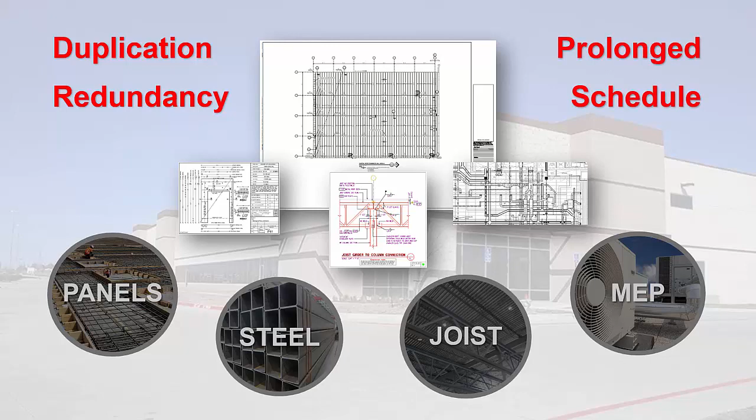Upfront detailing across the trades can take 8 weeks or more on projects. What if we could eliminate duplication and redundant coordination and reduce that to 2 weeks?

Introducing Power Panel from CMK BIM Consulting.

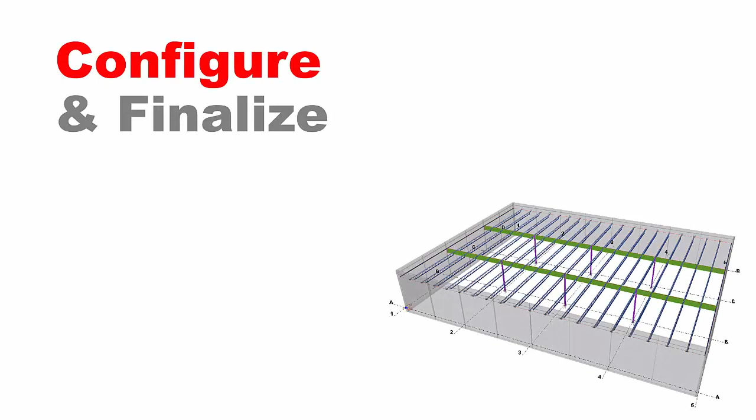TiltUp can be easily configured and then finalized. The main layout and each key element of the building can be configured in minutes. The panels and connections can then be refined in further detail. Steel and concrete drawings are extracted from the same coordinated 3D model, preventing duplication and extra coordination time.

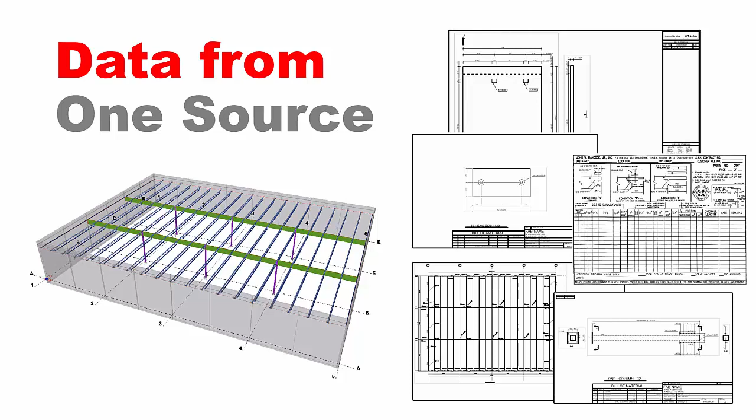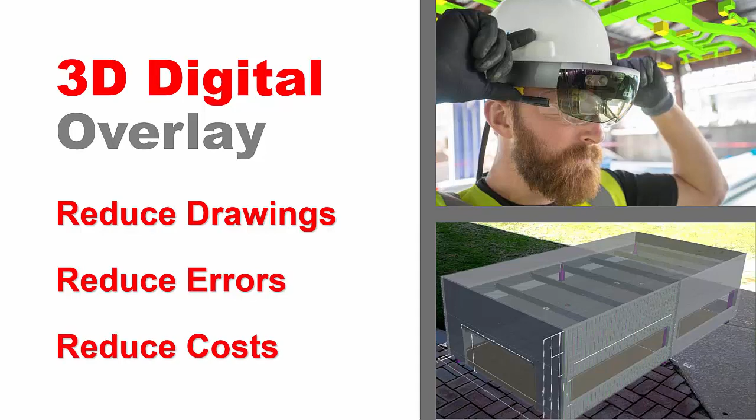The model can be easily published to the owner or other project stakeholders. And using Microsoft HoloLens or mobile devices, you can overlay the digital model in the real world. This reduces the need for drawings and allows the customers and contractor to see exactly what they're building.

To get started, let's first highlight the Power Panel plugin or configurator. We'll go ahead and open up the properties here, and you can see that I can enter in the typical building geometry that I'm going to use for a TiltUp project. I can enter in specific bay spacings, and it doesn't have to be equal. So I could do 3 spaces at 30, then I could do a 40-foot bay, or I can do any other odd bay size that I need here as a distance list.

I can do the same thing on the tilt panel spacing along the length or the width of the building, as well as do a maximum joist spacing or enter in specific spaces and distances that'll work with the grid system. Once you've entered in all of this information and in the most common joist, girder, or supporting beam, as well as tilt panel and column information, you can then easily configure and create the base foundation of all the elements of your TiltUp project.

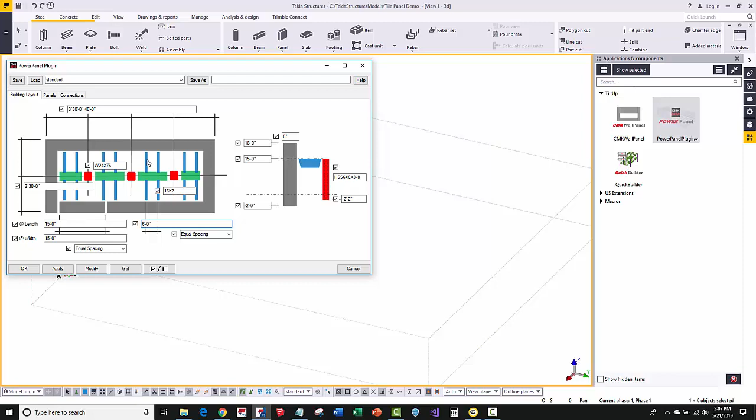So I'm just going to go ahead and say apply on these settings, and then I'm just going to basically activate the component. I will then pick an origin point or location and a second point to orientate this, and this is especially helpful if you have like an L-shaped TiltUp project or if you have multiple buildings that are working on the same overall project.

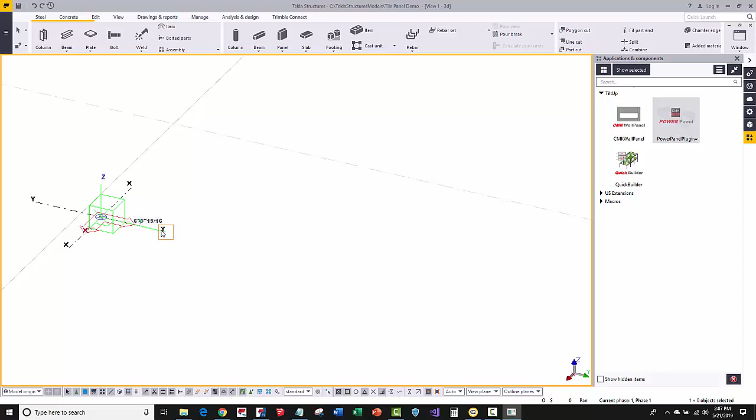So I'm just going to pick those 2 points, and here within a few seconds it's going to actually automatically put in all the panels, columns, joist, and then also place all of the embeds and pockets in the wall.

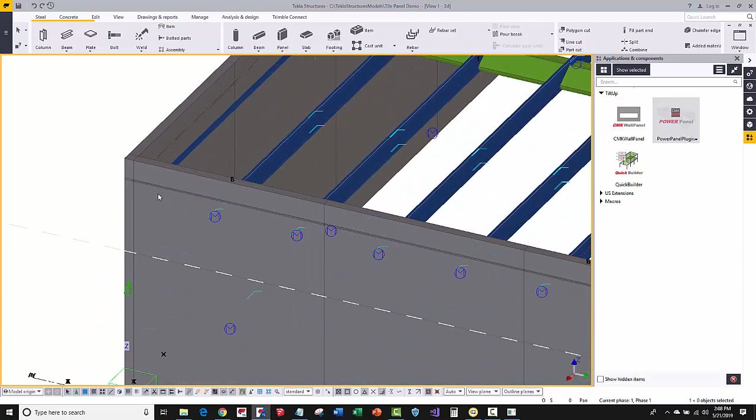Now here within seconds we can actually see all of the main elements of this structure in the TiltUp project has been placed. And we're going to continue to expand upon this, including all of the reveals here, any openings, even reinforcement we're going to start working on and placing here in the model.

So this gives you an idea of a fully parametric building that can be easily configured and even at this stage get a quick QTO or estimate on the project.

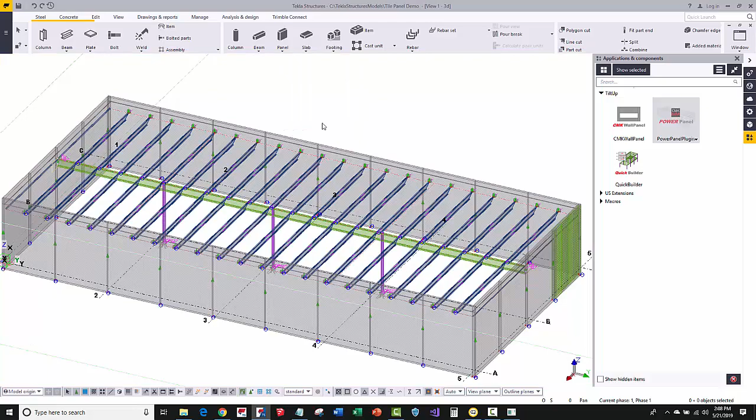Now at the same time we can easily explode this component here, and then we can continue to refine the detail and specific sizes or specific connections manually here by editing the model just using the normal out-of-the-box Tekla Structures BIM application.

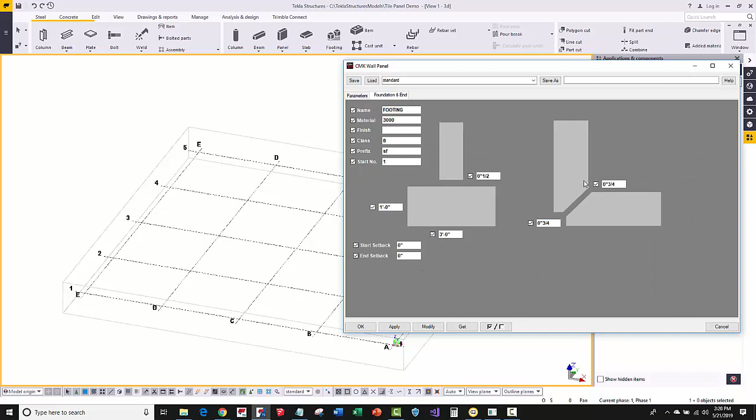Now, what if we have a project where we've got specialized panel inserts and different things other than a rectangular simple layout or building? Well, here we can use building block power tools such as the wall panel here, and if I open up the properties, you can see that I can enter in up to 4 openings, enter in the information, the width and the height, and then the location of that, as well as the end details here, as well as we're working on some of the other corner miters, the connection at the base.

So this does the main geometry, but then we can also automatically look around the panel, add in the reveals, as well as the other connecting information for panel to panel, or even steel framing into the panel as well.

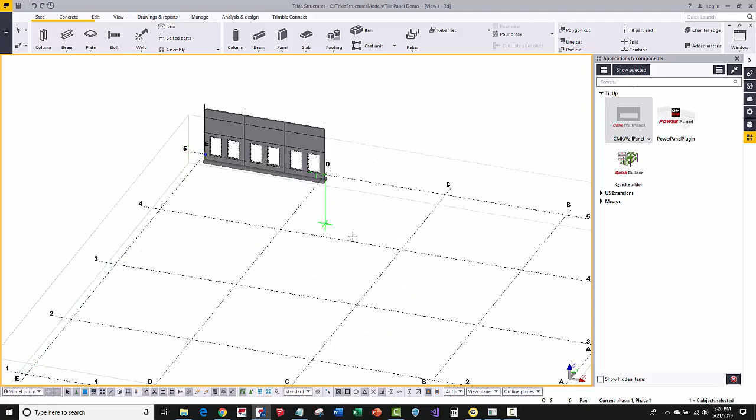Then let's just go ahead and apply these first here in the model. So we'll activate the component, we'll then select here that we've got our first 3 bays, and we can maybe have openings on these particular panels here. Let's go back to the properties and simply just turn off that we don't want any more of the openings.

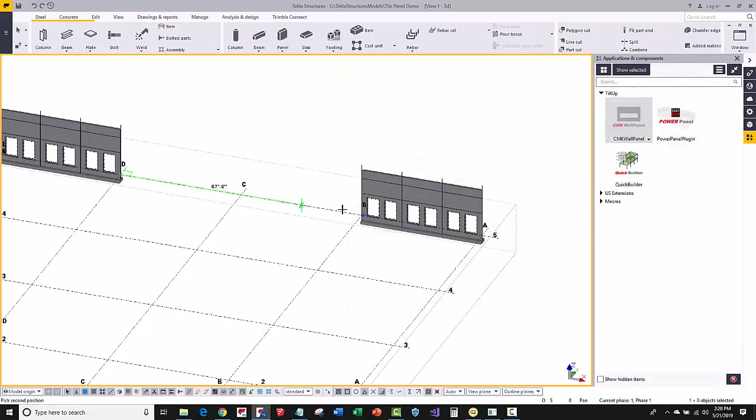Now we can just say no to all the openings here, or we can go ahead and use saved away standards that are already pre-configured for the different types of panels that we have on our job. So we'll just go ahead and say apply, and then we can come in here and pick 2 points, and now we've got all of our panels placed.

Now we can also repeat this process, but let's do a jog specifically here on the job. So let's say that I pick the corner here, then I'll go here, and then we'll come in, let's say 5 feet as an example. Then we'll just continue to build whatever we need, and then we'll just go out, and then we'll come back and continue to do those different architectural jogs or features that are on the project.

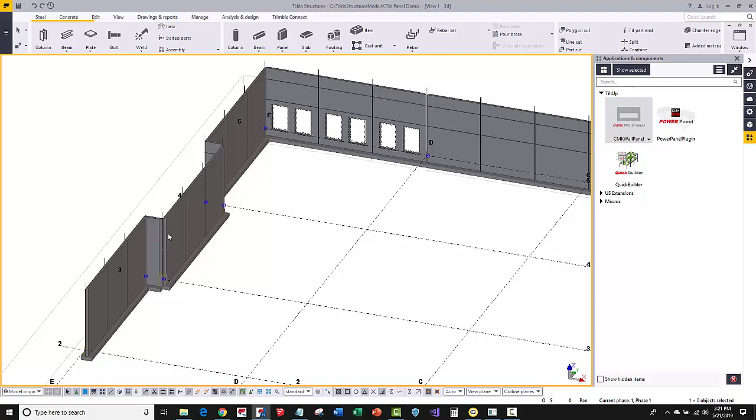If we need to then change or come back and modify any of the corner conditions based on the specific miters, or if you're doing a butt joint there or whatever that you'd like to set, you can easily go into the properties of each one of those panel components and modify and set those.

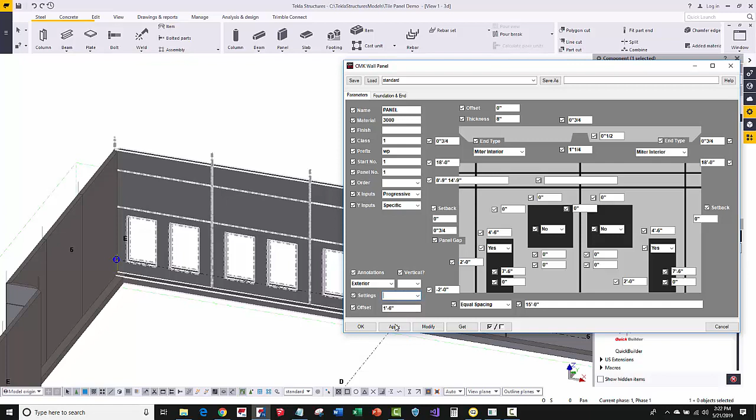Now, what if we actually want to see some dimensions here related to the panels? So we can come into the properties here, and then we're just going to say, let's show annotations. So we're going to do exterior annotations here, and then we're going to say we want them to be progressive, so that's good. So we'll just say apply, and then we'll go ahead and modify this component here. And then basically what it'll do is it'll place in all of those dimensions for me.

So that way I can quickly check any of the opening spaces, and I can also evaluate any of the vertical dimensions and elevations. So if I'm taking information off the design, I can visually quickly check that 2D information overlaid in 3D.

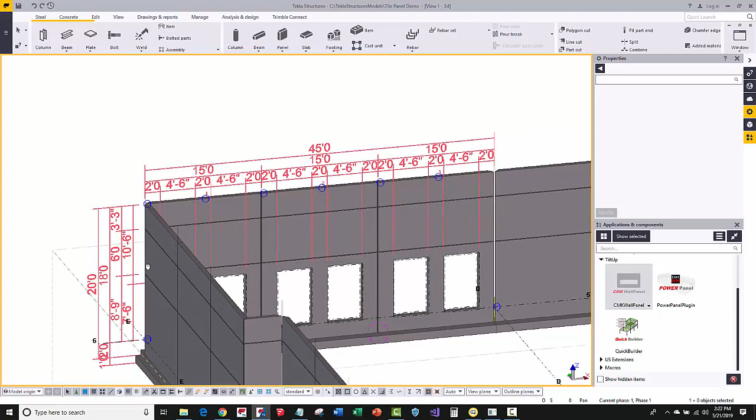Now, going beyond even just tilt panel projects, we've also made other tools that help configure a steel with a precast or other exterior configuration that goes around the envelope of the structure. And so similar tools that we built here in Quick Builder can also be applied to CMK Wall Panel, with similar functionalities just for a different building or configuration type.

So again, you can see here I can specify different bay information, enter in all my grids, specify the common sizes, and then that's the main structure. And then here I've got some things that will actually do the precast exterior panels or glazing panels or whatever it is that we need.

Now, if I do want to make kind of a design build or a quick rapid configuration of this project, in working with an owner, then I can also specify a carpet system, also a ceiling system here, just to get clearances for understanding how MEP might work and getting different heights and what's going to be more cost efficient, etc. The other nice thing here is that we can also automatically generate our floor plans and elevations and quickly create an estimating package, as well as bill of material or quantity takeoff reports of all of the components and parts in the model.

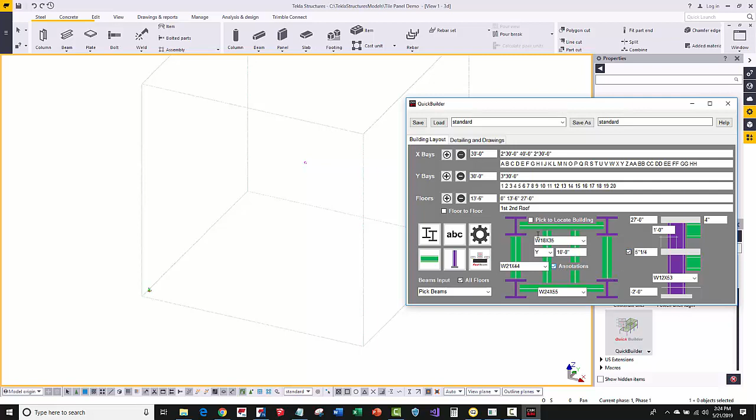So here, just rapidly doing this, let's make sure that we've got annotations turned on. I'm going to make sure concrete is turned on here, so it'll create the slabs. We'll create the exterior, the floor, as well as the ceiling, and then we'll simply come over here and say create the structure.

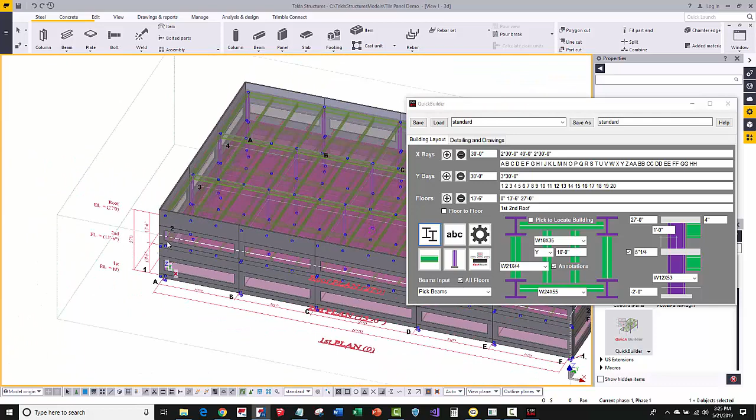So within about 25 to 30 seconds, it automatically created all of the exterior panels. It shows me all the concrete slabs. It puts in the marks and the profiles for all the structural steel and the concrete, shows the grid dimensions and elevations, and essentially what I have here is a BIM deliverable that represents the rough quantities, including connections if I'd like to apply that, and all of the building systems working together.

Again, imagine that you're working on requirements with the owner: what are the occupation requirements of the building, what kind of square footage are you looking for, and then using rule of thumb settings and configurations of each of the primary structural trades and working those together. Here within seconds, I've actually configured that, and then I can share this with the sprinkler system or MEP group for them to put in their conceptual modeling and information here.

And again, we can very rapidly get a detailed estimate, and then we can pass this information on to the design to do further engineering or analysis, as well as detailing for fabrication and manufacturing.

So this gives you a glimpse into some of the power and the configurator tools that we're doing here at CMK BIM Consulting. Again, these are some of the first starts of things that we've been creating and working on,